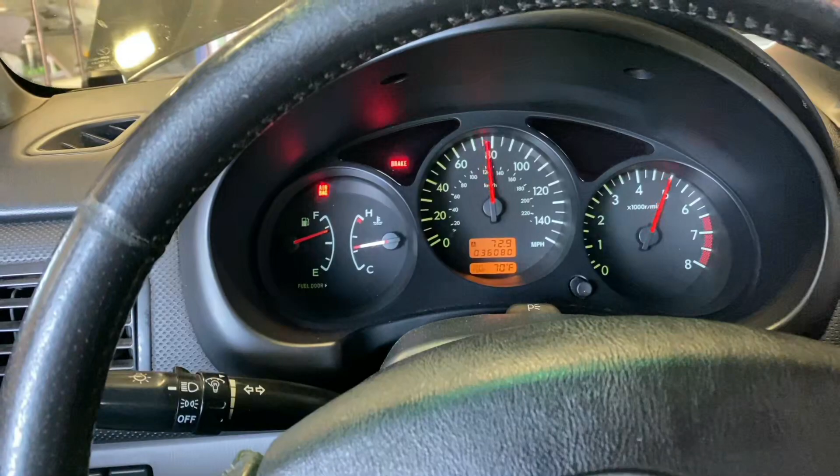Alright, got another good dyno video for you guys here. We have a really nice STI on the dyno. It's got a lot of big parts on it, so we're going to be retuning this car today.

I'm going to take you guys over here and show you a little bit about what's done to this thing. But this one's pretty cool. It's got a full IAG Stage 4 Extreme motor in it, a 6870 twin scroll ETS turbo kit, and these new ID 2600 injectors.

These are new to me, I've never done a set of these yet, so I am curious because they just came out on the market. These things are monsters. It's got the full fuel system in the car, the Radium double pumper. This thing's got all the parts, so it should literally make all the power.

The reason why it's here is because he's not quite sure what it's putting down or very happy with it. He thinks it's capable of more.

One thing I am very confused about, and I don't even know how to explain this the way I'm feeling, but this thing, if you look here, it has a stock map sensor on it. So I'm mind blown on that. I want to do a base pull and see how much boost it's running. I'm curious, but when I retune this thing, I'm going to be pulling that off. We're putting a 5-bar on it. We're going to do it right.

But other than that, everything else looks good on the car. It looks like it's got everything it needs besides that little deal there. So we're going to do a base pull, see what it makes. Here we go.

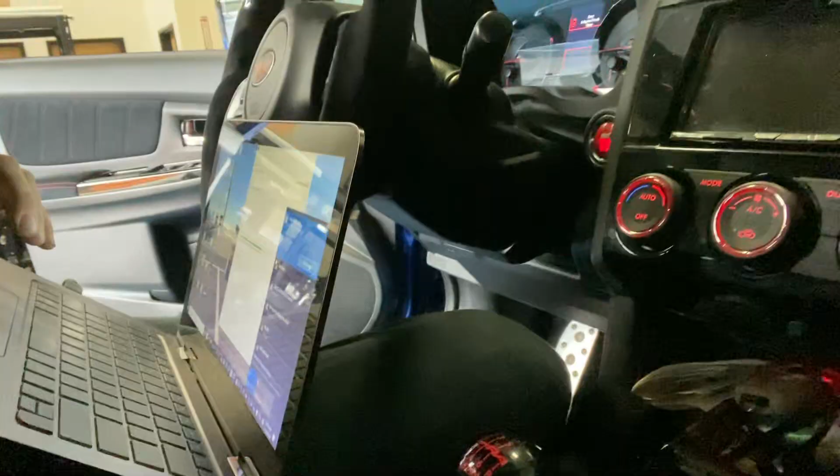So I did data log that pull with the way it came in so that we could see exactly what's going on and see if there's an issue, and try to figure this out. So I'm going to pull the data log now out of the access port. Got the access port hooked up now. We're going to pull the log out, and then I'm going to take a look at things and see where we go from here.

Alright, so we're looking at the data log from that last pull here. We're trying to figure out what's going on. This is still with the tune the car came in with, I haven't flashed it or anything. You can see RPM was ramping up here, and then if you look here, we got our air fuel, and we got wastegate duty.

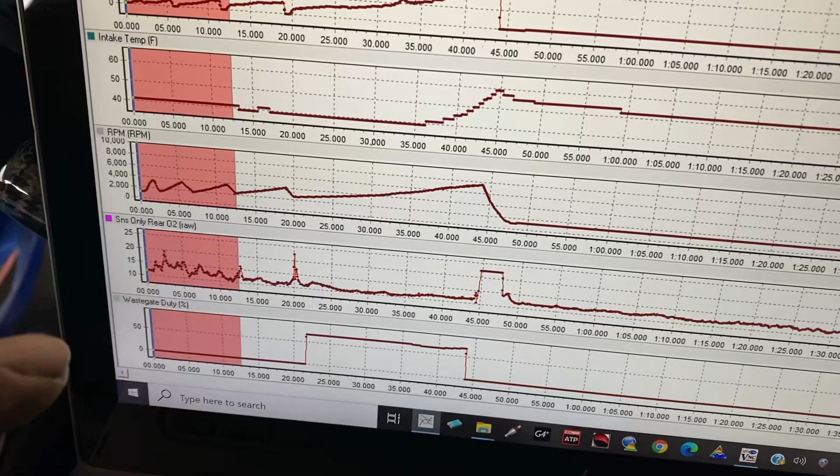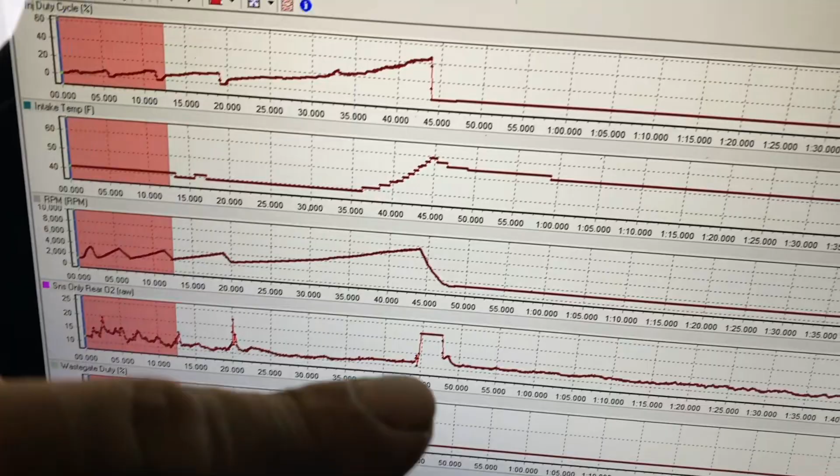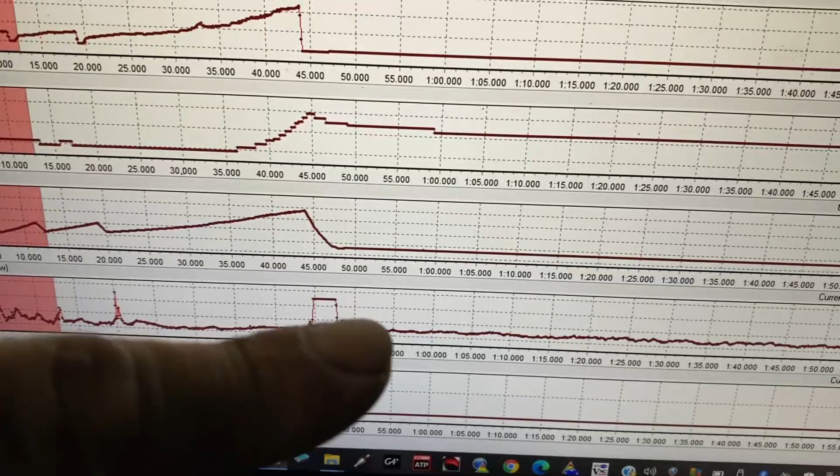So looking at this, you look at the RPM, how it's ramping up. We got duty cycle on the wastegate, which is a good thing. So something is not quite adding up here. 50% wastegate duty or so on a 4-port should be a lot more than 12 PSI. So definitely got something there. There's a couple other little things that I'm noticing here - I was looking at the cam timing.

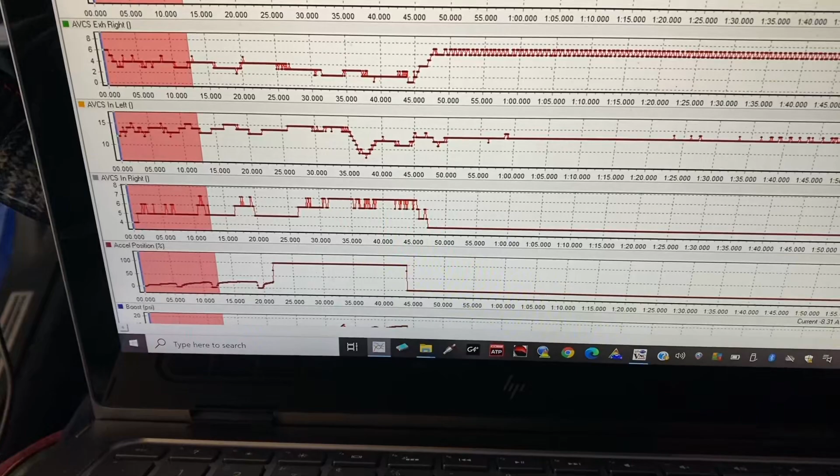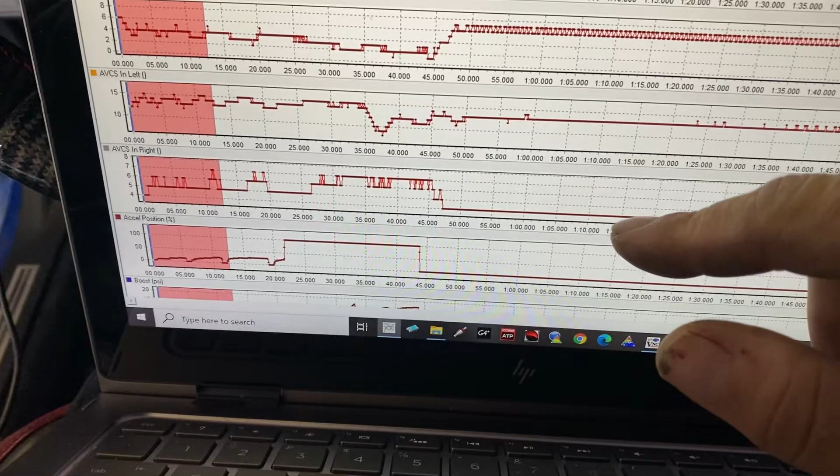Cam timing looks interesting, so let me pull it up here for you guys. So there's AVCS on the right and AVCS on the left. You guys can see here there's a huge difference, and this is not good. Anytime you have your cam timing on one side dramatically different than the other, you're obviously going to have issues. So left and right intake cam timing, there's a huge spread there.

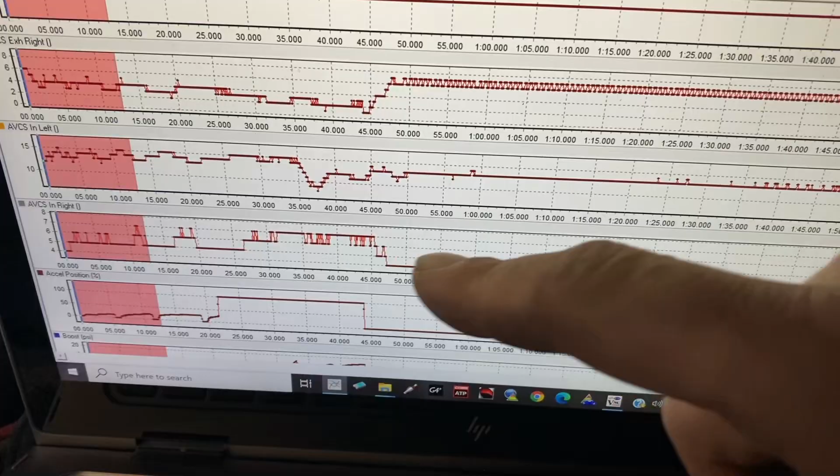What's weird is it looks like it's working down here, but you can see it's not even following the other cam very well. And then once we get into boost, it just drops off on this one, but this one holds steady.

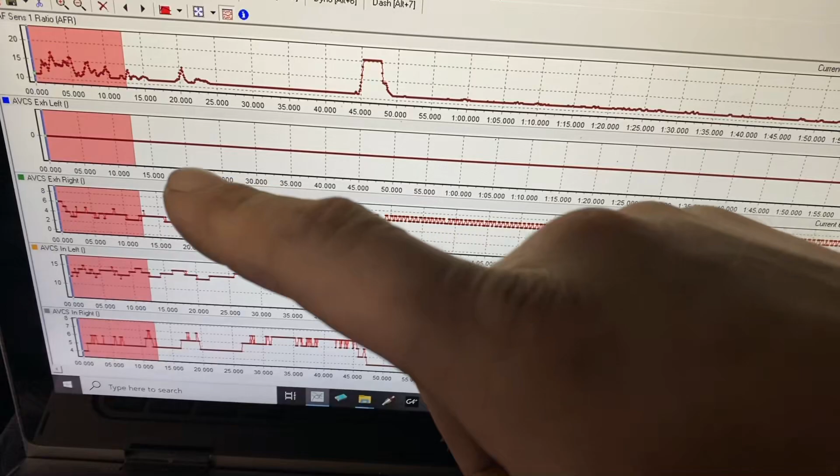If we look at the exhaust cam, it's doing the same thing, which is weird. The exhaust side on the left is zeroed out, but the right side has 7 or 8 degrees of retard, which is right where it should be. So we've got something weird going on here.

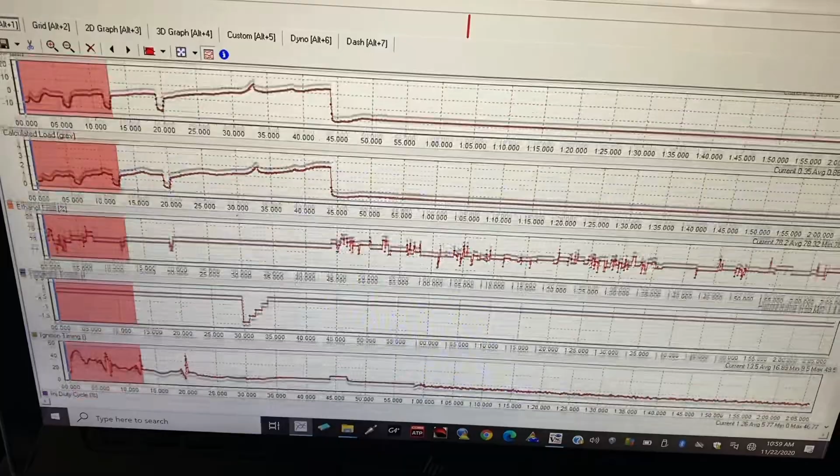However, that's not what's causing our boost issue. So now we need to start looking at a few things under the hood and see what we can find. All right, so I was going over everything here, and first thing I drew my attention to was this

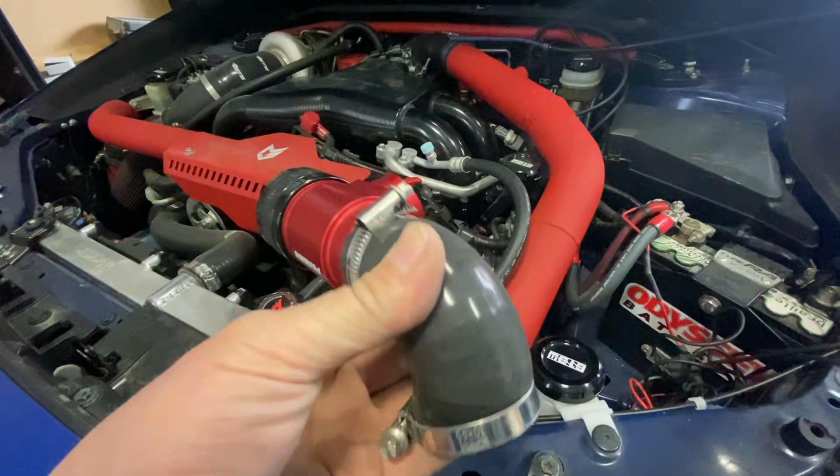Blow-off valve. I mean, these have their place, but in my opinion, not on a car with this type of turbo, because these are not really designed to run the boost levels these turbos are capable of. But I started looking at it, and I found a couple things.

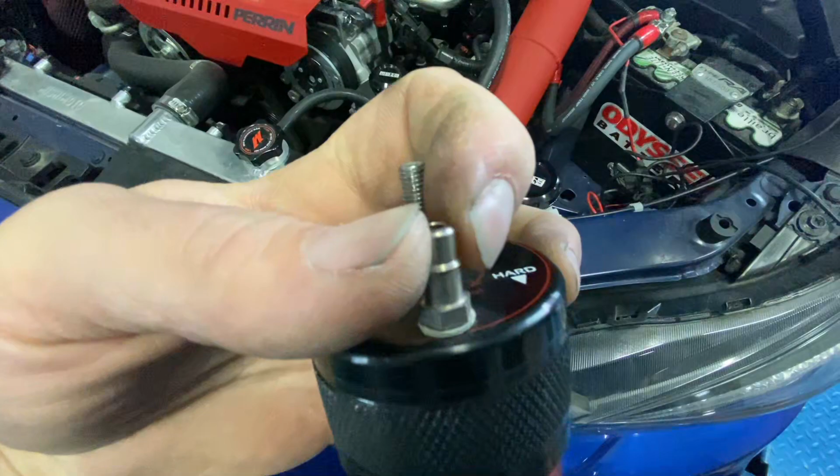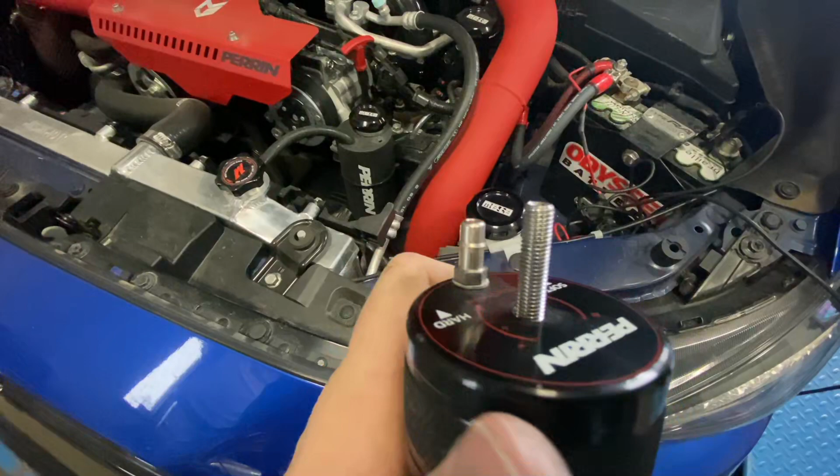One thing on top here, this nipple is completely loose, so that is definitely going to be an issue there. Also, if you look at the threads they're showing, this thing has loosened up too. That's one of the issues with these blow-off valves, is over time these will loosen up on you and they will start bleeding off boost and leaking boost out of the side here.

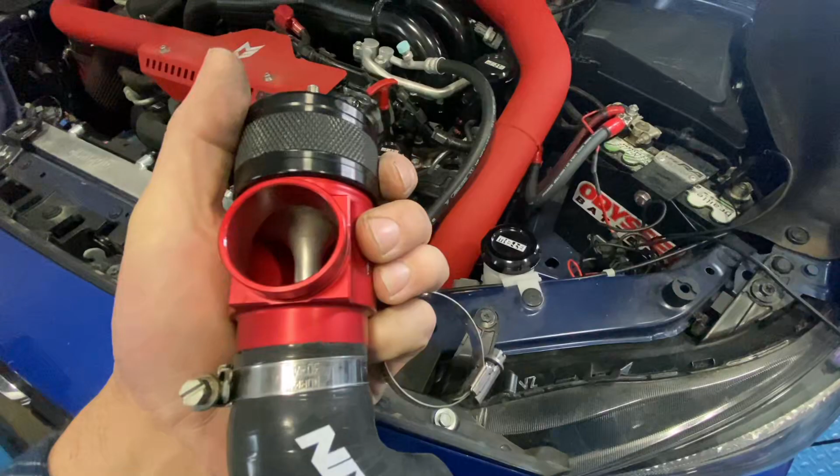So what we're going to do for testing purposes is tighten all this down, and max crank this thing down because I don't want it to leak at all. And then we're going to do another pull and see if our boost comes back and see what this thing will make.

I just hope the car wasn't tuned with this issue, because once I crank this down and fix it, we could see more boost than we've ever seen. If I see something crazy on the dyno on the boost, I'll let off. But if it looks within the ranges of where he said the car was tuned, then I'll stay in it. So I'm going to fix this and then we'll put it back on.

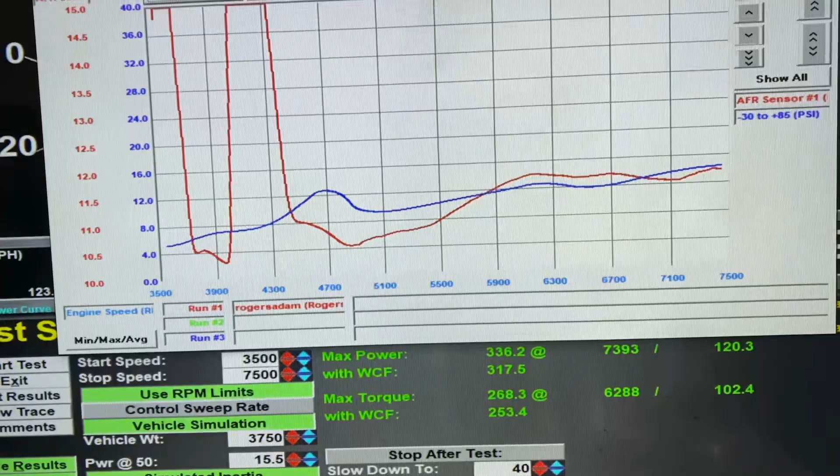All right, here's the numbers to beat. So we got the blow-off valve fixed. Let's do another pull and see if we can get more.

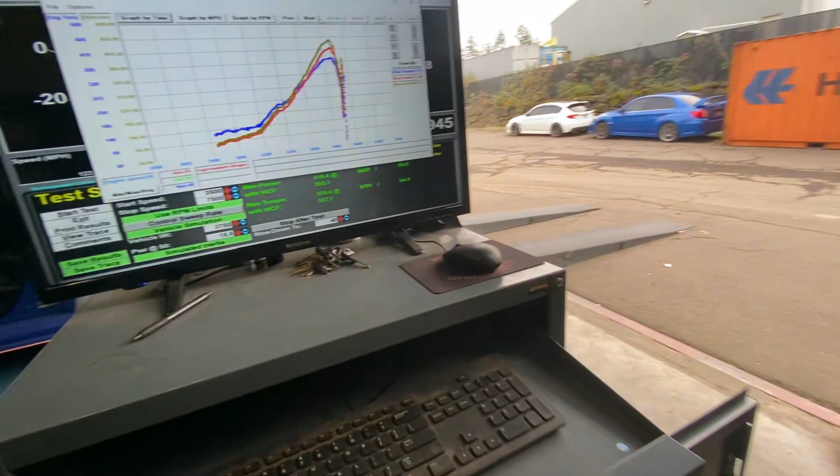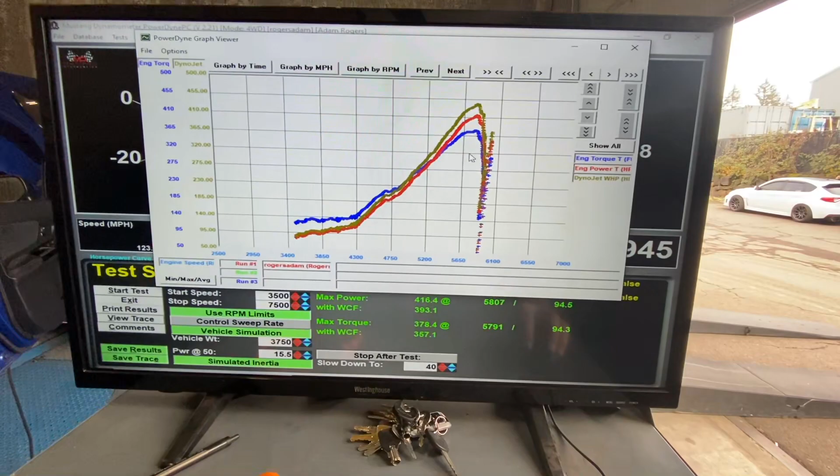All right, well, that pull did make more power, but unfortunately the car started breaking up and just wasn't happy, so I had to let out of it. As you can see right here, I was actually still in it when it dropped off, and then I let out and it shot up there. So, looks like I've got my work cut out for me on this one.

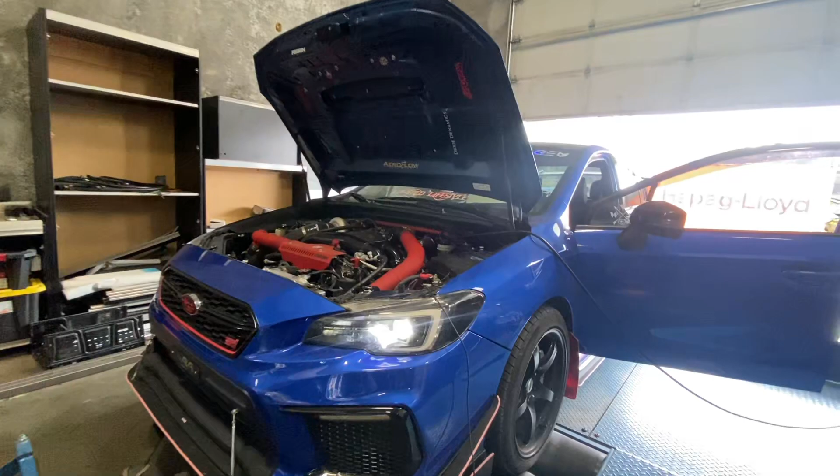So we've got a few issues we've got to figure out. I'm going to pull the log off the last pull and see, but yeah, it was definitely missing. I'm not sure if it was fuel related or spark, I'm going to have to look into that. I'm going to start checking the logs, go over everything, see what I can do, and then we're going to see if we can get this thing running right, because it should definitely run a lot better.

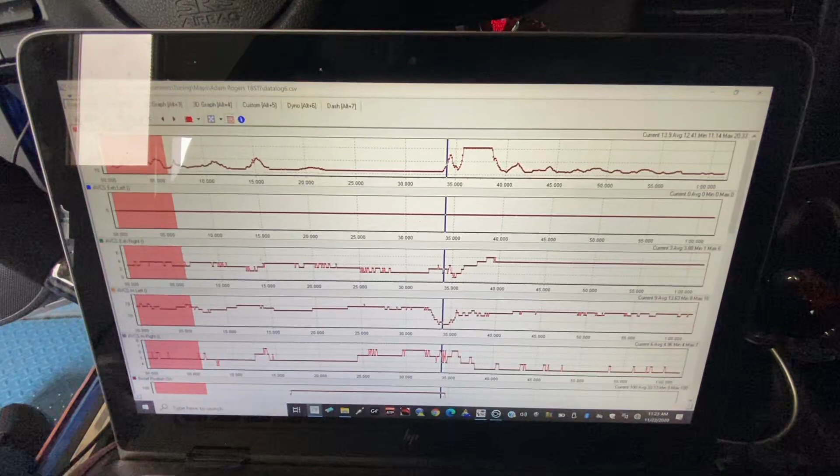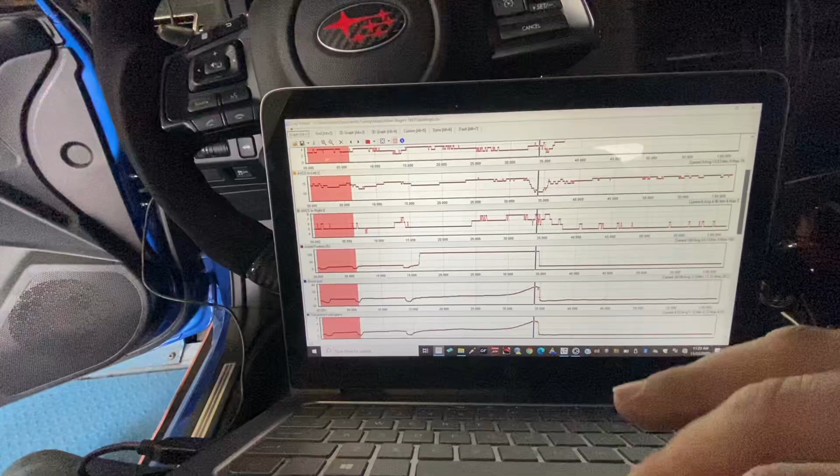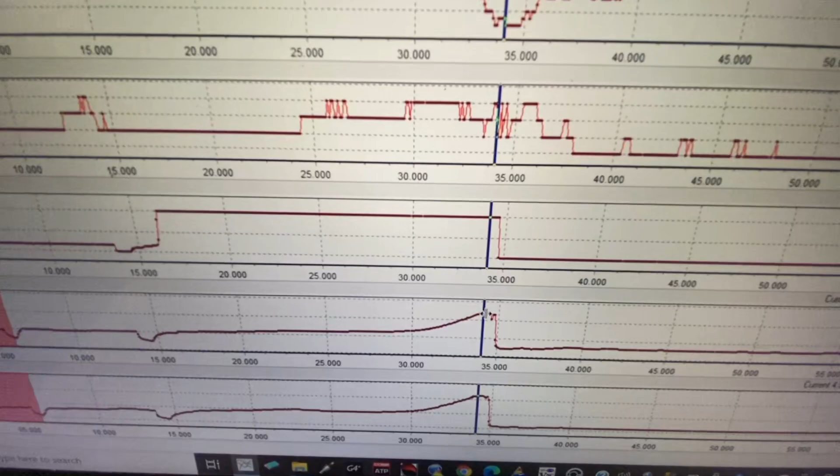All right, so that last pull we did, we definitely hit more boost. Something very funny though that I was just pointing out, and something I was worried about, is this map sensor deal. As far as the ECU is concerned, we hit 28 psi, right? So if we look there, 28.2 psi, which the sensor is reading, right?

Well, as expected, let's see if we can go over here to the dyno and see what the dyno saw, because I know it was a lot higher than that.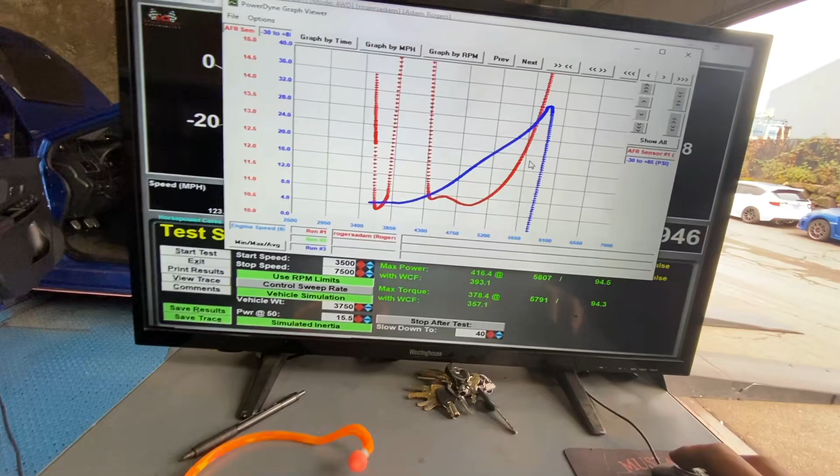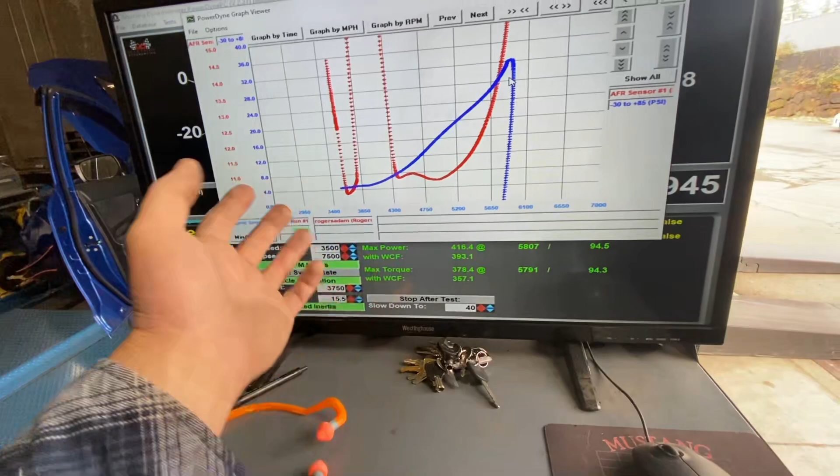We saw 32 PSI or so at the peak there before we let off. The air fuel was stable at 11.0 and then it just leaned all the way out. So what we've got going on here is exactly what I was worried about. We've got a stock map sensor running, and the engine's running more boost than the ECU really knows, so it's just a bad situation. It's just not the right way to do things, in my opinion. I guess I do things a little differently, but to me, this is just a recipe for disaster.

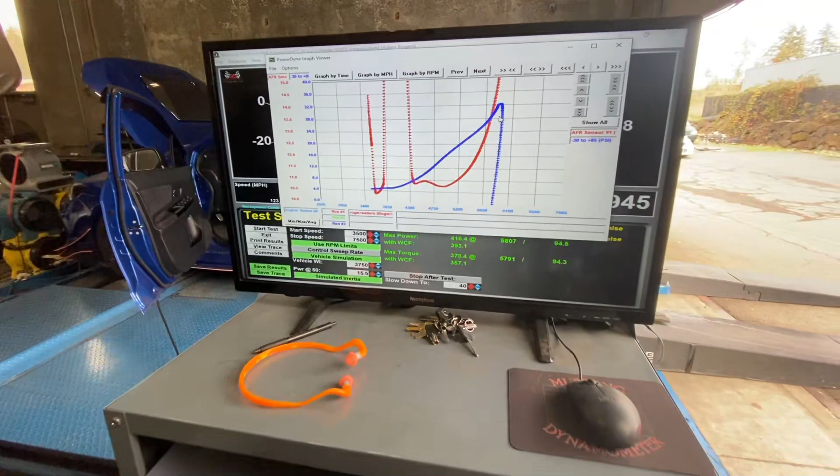Most of this stuff could be taken care of pretty easily, but the only issue I'm really worried about is the cam timing on this car, because the cam timing is way off on these logs. We're seeing left and right bank differences quite a bit. One bank on the exhaust, the cam timing is just dead - flat 0. The other bank is 7 or 8 retard. Then we've got 15 degrees advance on one, and we've got 5 on the other.

So I mean, that issue right there is a big deal. I can't make the car perform the way it's supposed to with my cam timing that far off. I know I could make it better than it is now, but in the end, it's not going to be what the car is supposed to be, and it's not going to be right.

So we're probably going to have to call it today, because that's pretty involved, getting in there with the cam timing, and we're just not set up for that right now. We don't have parts and all that good stuff. So I'm definitely going to recommend pulling the timing belt off this, or pulling the covers off, checking the timing belt first, making sure the crank reluctor wheels and everything inside are good. And if all that checks out, then I'm going to recommend throwing a set of gears at this thing with some solenoids, and that should take care of it.

So that's what needs to happen. This car's got a pretty serious motor in it with a really good setup, and you just keep pushing through issues like this, you're going to end up damaging the motor, and then it's just not a good thing. So all right, well, we're calling it on this one.

I'm really bummed, I'm disappointed. I really wanted to see this thing rip today and make some awesome numbers, because I know it can. But we got to do it right. We got to just step back for a second and say, we've got a $20,000 engine in this thing. All the other parts - you just can't cut corners and do it half-assed. You got to do it right if you want to make those awesome numbers and you want the thing to stay together. So I've told him everything he needs to do, what I recommend.